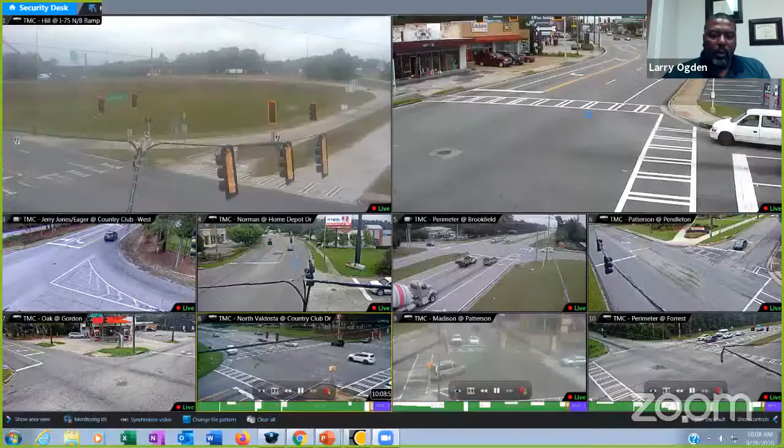Currently, we have 60 cameras at the intersections. We're monitoring traffic to make sure everything flows freely. We try to make it as friendly as possible for the people who live in Valdosta, visit Valdosta, and like to come here and play. We use our cameras for a variety of reasons, but the main one is to make sure traffic is flowing smoothly. If traffic is flowing smoothly here, we won't get that many complaints.

The cameras up here now are some of the intersections where we get a lot of complaints from. The first one at the top left is our northbound exit off of I-75. With that exit, we usually have a problem in the morning time where buses are exiting the interstate.

We're one of the few cities, I guess, that has a situation where we're a city municipality, but we have a county high school located within our city limits. At this intersection, when the buses exit in the morning time, it causes a backup out onto the interstate. So we're using the cameras currently to monitor that and try to make timing changes as needed so that we can alleviate that problem and reduce that hazard, that risk of vehicular accidents with the buses and the high volume traffic on the interstate.

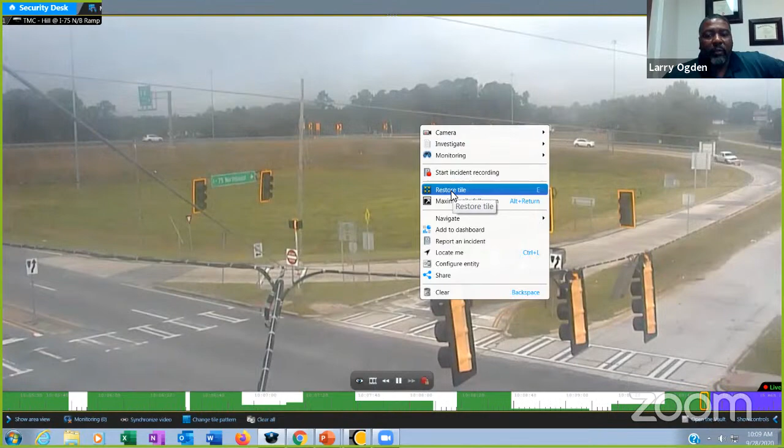We place the cameras throughout the city of Valdosta based on, like I said earlier, complaints that we may receive. If we get a complaint about traffic not flowing or the signal not changing, we use this information. We can go back to the camera and look for those issues when the citizens call them in.

We work closely with the city school system and the county school system, being that the high school is located within the city limits. With the RTC, we can program our school zone clocks for the whole year. Once we program those for the whole year, it takes a big burden off of us because once they're programmed, we don't have to really worry about that system anymore.

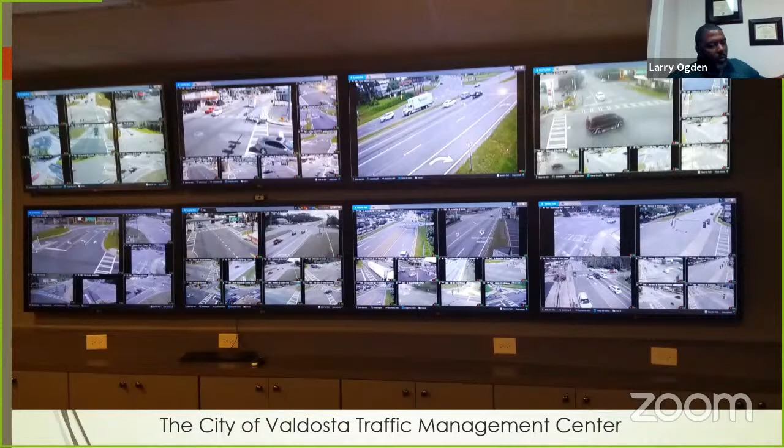The city of Valdosta is one of the gateway cities coming into South Georgia. We have several colleges here: Valdosta State University, Georgia Military College, and Wiregrass Technical College. Being the gateway to Georgia, we try to make it as friendly and inviting as we can, using our technology to promote the city of Valdosta.

Here we have our TMC, where we have many monitors where we can view the majority of the cameras we currently have. The Traffic Management Center is solely for managing and monitoring traffic flow. If technicians notice anything that's not running right, we can quickly dispatch a technician out to that area to see what's going on so we can get it fixed quickly.

As I said earlier, we're using technology like the Glance system, which we recently implemented a few years ago. We use RTC Connect to help with school zones and traffic flow of the buses. We use MaxView, a technology we've been using for several years, where we can get real-time monitoring of the intersection.

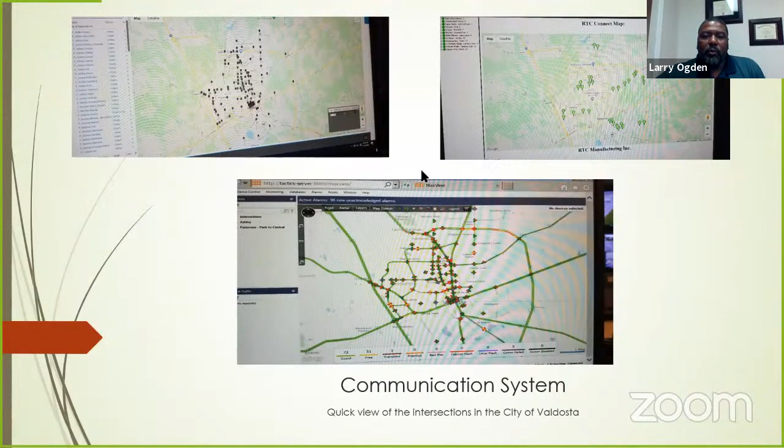If we get a call that a signal is not operating properly, we can go in and do real-time monitoring, making sure the loops are working and the data is correct before we send a technician out to investigate. The RTC is used with the buses, and we also want to make sure it's safe for all the kids going back and forth to school.

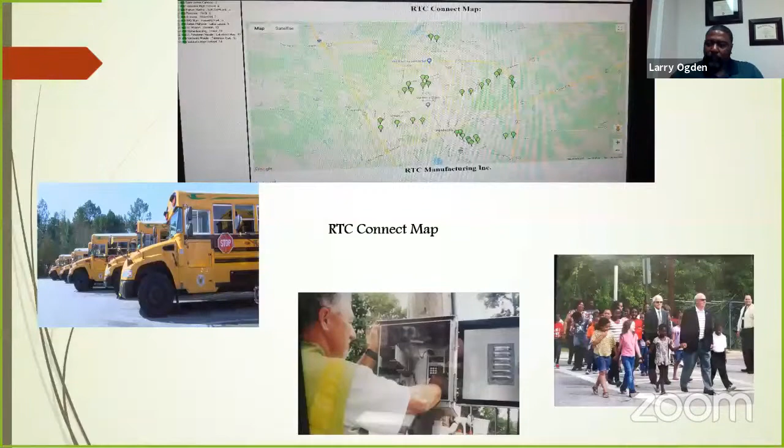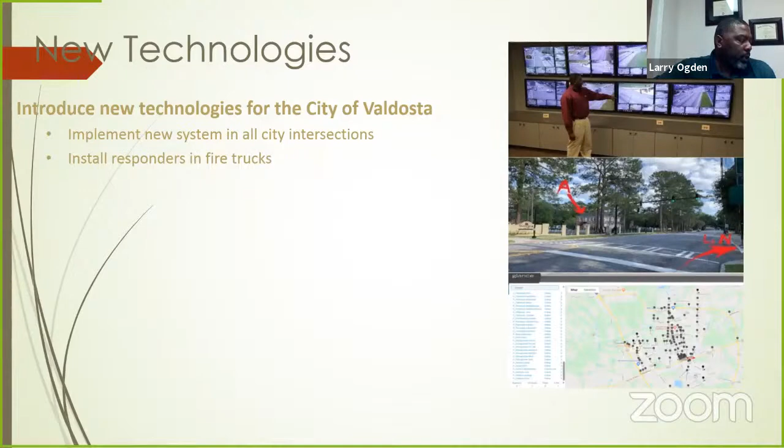New technologies that we're trying to implement: currently, we are in the process of working with Georgia Tech and Valdosta State University, because we have just been awarded the Georgia Smart Communities grant. With that, we're going to bring the technology of the Travel Safely app here to the city of Valdosta.

With the Travel Safely app, we will be able to activate more functions in our signal cabinets and the controller, so that the traveling public and walking public will be able to use this app to know how much time they have before the light goes red, green, or yellow. It will give them real-time monitoring of the signal, so we're trying to make it as safe as we can for the public who are out there traveling.

Walking, in conjunction with Georgia Tech and Valdosta State University, we will have students coming in to work with us to start collecting data. Hopefully in the future, if the opportunity comes up, we'll be able to give an update on the Travel Safely app once we have it all installed in the city and all the cabinets.

Here, what we want to do is make sure we enhance the city's traffic management center with the Travel Safely app. We want to make sure we can put it in all 128 signals throughout the city, the Travel Safely mobile app. This app is going to connect vehicles and connected phones, so in the future we're very excited about Travel Safely.

We want to also analyze the changes in traffic, see if this app will make it safer for the citizens throughout the city, especially the college kids around campus. They always have their mobile devices in hand, so hopefully in the future we can do a new report and give an update on how this app has helped the city as a whole.

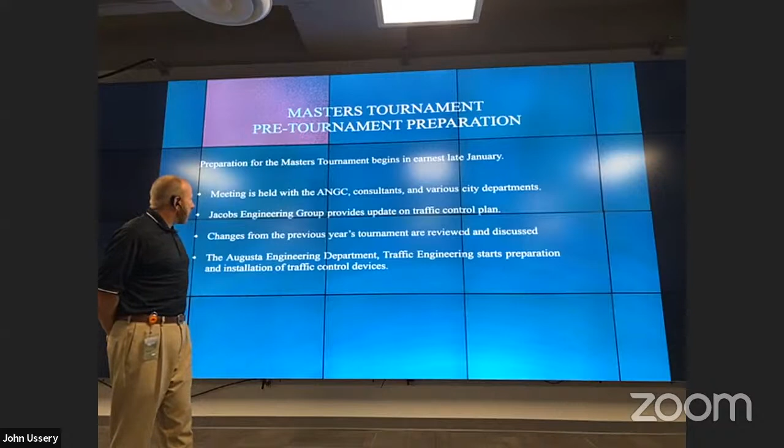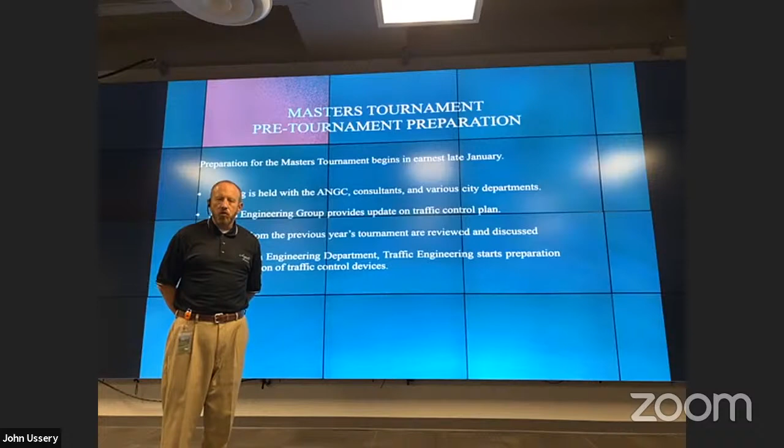A meeting is held with ANGC consultants and various city departments in February. Jacobs Engineering Group provides the update for the traffic control plan yearly, and I think they're one of the sponsors of this event. Every year they provide an update for the traffic control plan that we all use. It starts as sort of the foundation for how we control traffic for the Masters tournament.

Every year, our goal is to make it a little bit better than it was last year. So every year we talk about what happened last year and some of the changes we could make this year to make it better, make it flow better, and try to get people into and out of the golf course in a more efficient manner.

And lastly, the Augusta Engineering Department, Traffic Engineering, we start preparation and installation of the traffic control devices in March, and it begins in earnest after that, but we've been planning for a few months before that.

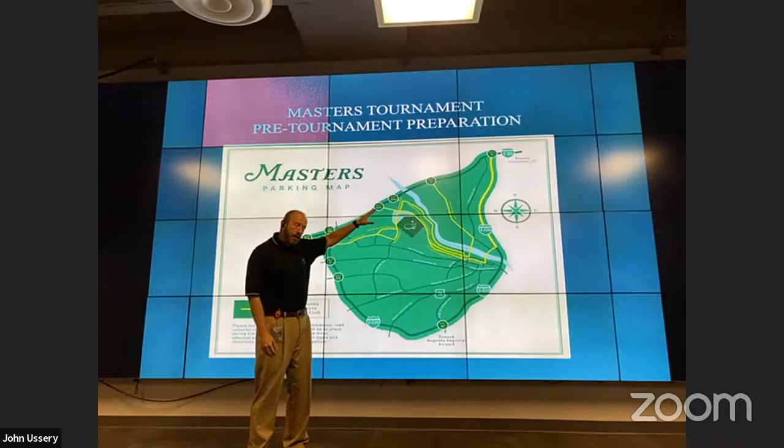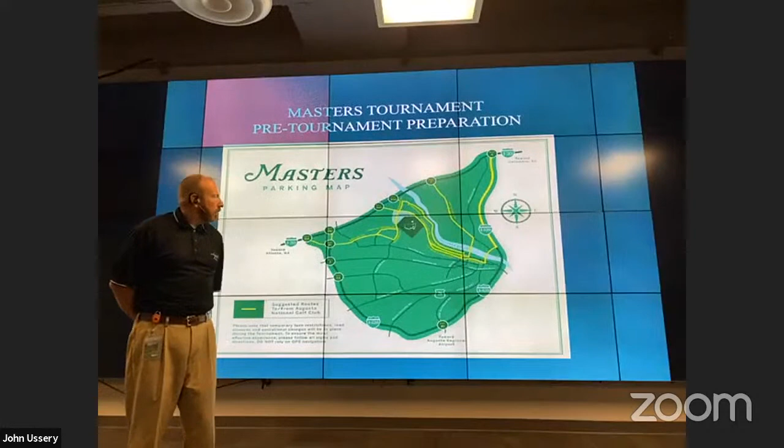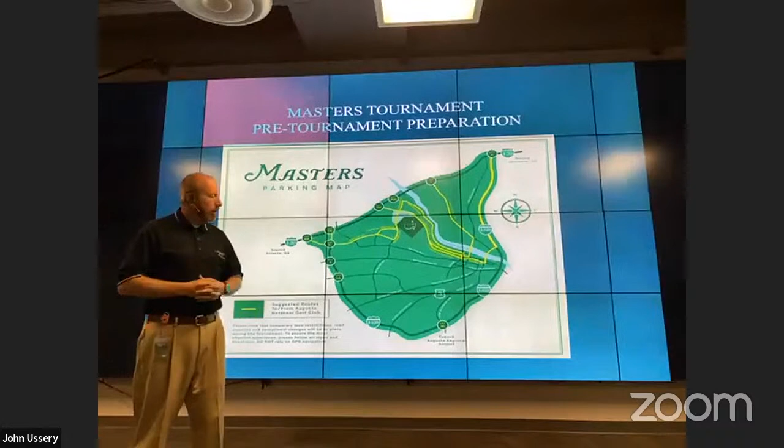So this map here shows you the main routes into and out of Augusta National. If you've ever been to Augusta, you know Interstate 20 is this top line here, on the north side of Augusta. And then we have a bypass loop, which is Interstate 520, or Bobby Jones, as we call it here. You can see Augusta National is here in the middle. The yellow lines are the main routes that we use to go into and out of Augusta National, and those are the ways that we really focus on and prepare to use when it's time for the tournament. Those are the ones we sign and direct the traveling public to.

So I included this slide here to show some of the unique things we do for the tournament. This is the inbound plan, one of the slides for the inbound plan. What's unique about this is there is so much traffic trying to come into Augusta, which is a medium-sized city with medium-sized city capacity. We need to do something with all that traffic that's going to arrive in about a 2 to 3 hour window.

So what we do in the morning is, if you're heading from Atlanta towards Augusta, or heading eastbound, we close the Washington Road off-ramp, because Washington Road down there at the bottom of the slide is the most direct way to get to the Augusta National property. But if you're heading from Atlanta towards Augusta, we actually close that off-ramp and don't allow you to utilize it. We make you go all the way up to Riverwatch Parkway, which is the next major street and off-ramp off Interstate 20 -- it's the yellow line -- and we require everybody to get off there.

What that does is it allows us to better control the inflow of traffic from both directions. If you're coming from Atlanta, you get off at Riverwatch Parkway, and then there are two different options to get to the golf course. The most direct is you go down a road we named Alexander Drive, and that'll take you right to Augusta National property.

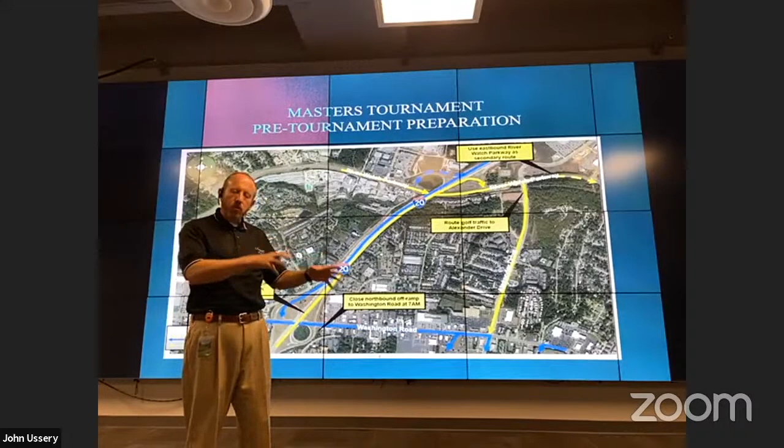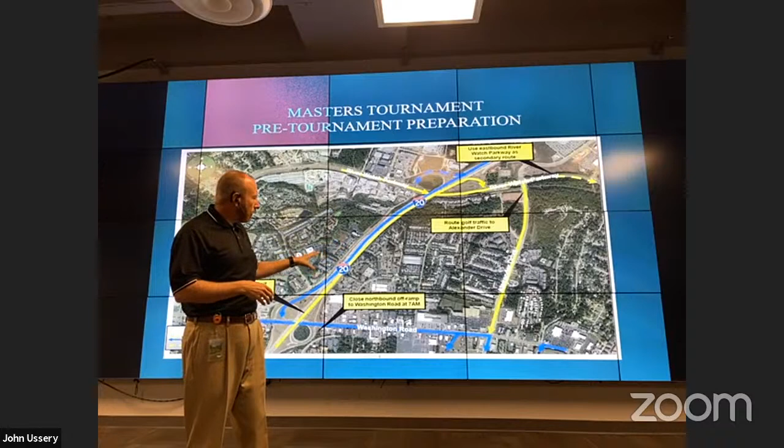And then we'll cycle through who can get to the tournament and which road is going to get the majority of the green time to get to the tournament. We have 3 different directions we can use, and we switch between them to make sure nobody sits in traffic without moving for too long of a time.

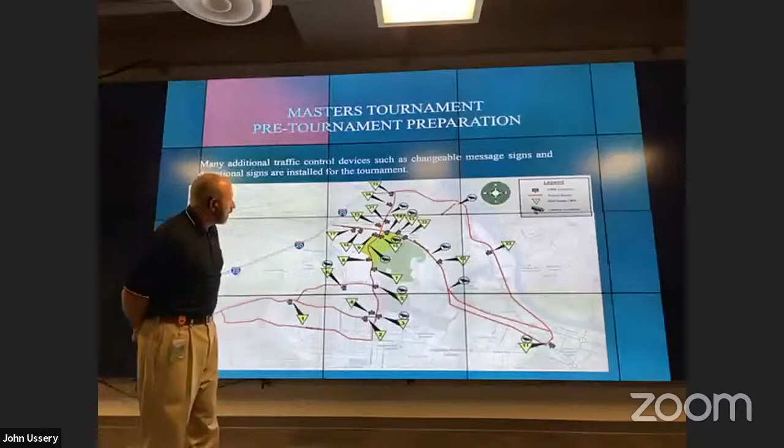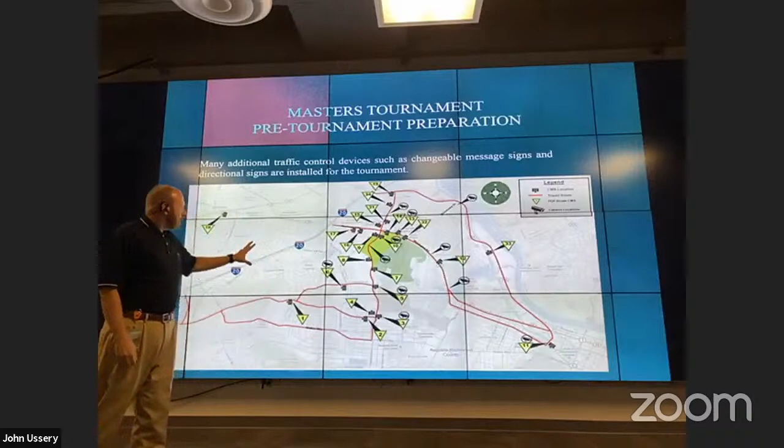Next slide. I included this slide to show all of the various directional boards and portable cameras that we install. You can see all the CMS boards, all the little numbers, placed all throughout Augusta, and even the interstate, which isn't shown here, to help control and direct traffic as it comes to and from Augusta National.

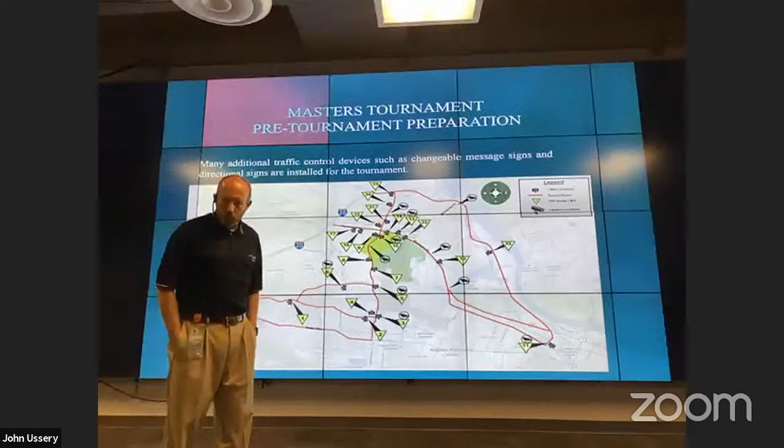The company that provides all of this is actually stationed here with us in our traffic management center, which we'll get to in a bit, a hub of activity for this tournament with a lot of people doing various things. We're working with them in real time. We have several pre-programmed messages in the CMS boards and can change them as needed based on how traffic is behaving and who is or isn't following directions, so we can adjust the traffic and get it where it needs to go.

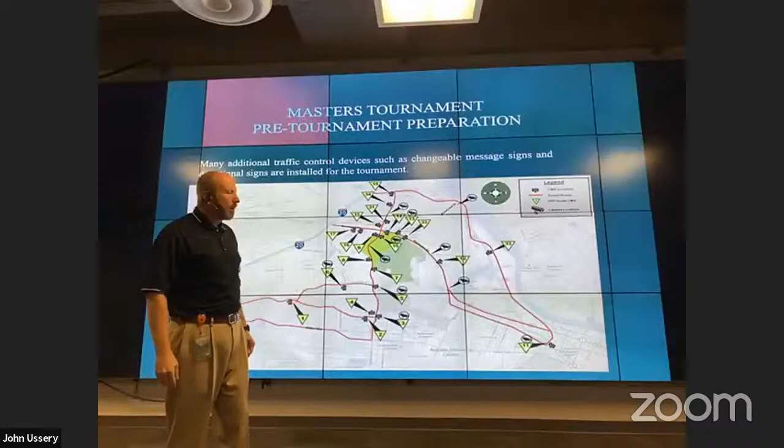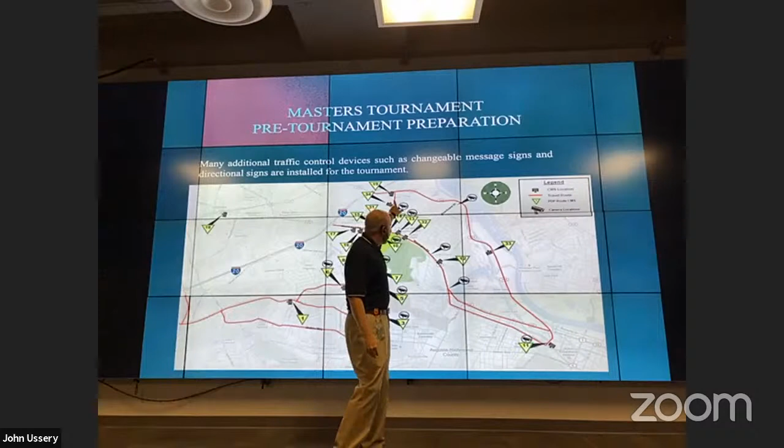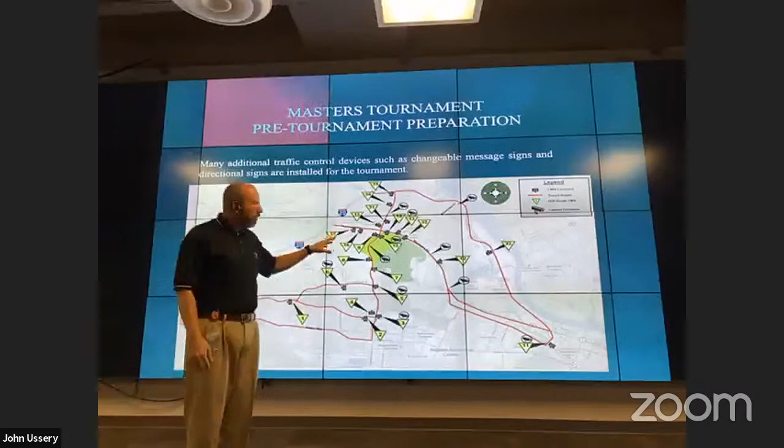I mentioned earlier that if you're coming from Atlanta, we force you to get off at Riverwatch Parkway, and sometimes we send you downtown. You can see that loop here, this red line that goes all the way downtown and then comes back. That allows us to keep traffic moving, even though it's a longer trip to get to Augusta National, so you're always sort of moving instead of just sitting in traffic without being able to go anywhere.

Next slide. The reason I show this picture is traffic engineering. For our months of preparation, we have a lot of signs, not just changeable message signs, but also a lot of static signs that we put up all over the city to help direct golf traffic.

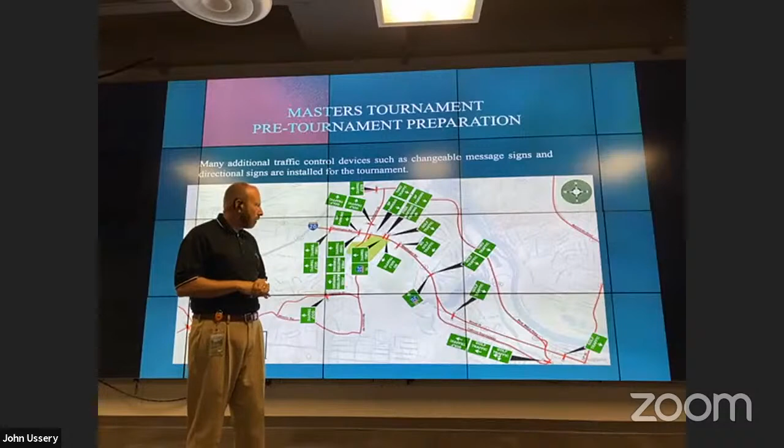We used to put the word Masters on the signs, but we had an issue with that—mostly people would try to take the signs because they had the word Masters on them. So now we have golf traffic signs all throughout the area, and every major route into Augusta National has its own specific directions. Between the static signs and the CMS boards, we're able to direct traffic where they need to go.

Another thing we use is social media. We have a connection with Twitter and all of that, and we send out alerts. The radio stations and TV stations pick up on those, and that also helps traffic flow along the major routes into and out of the golf course.

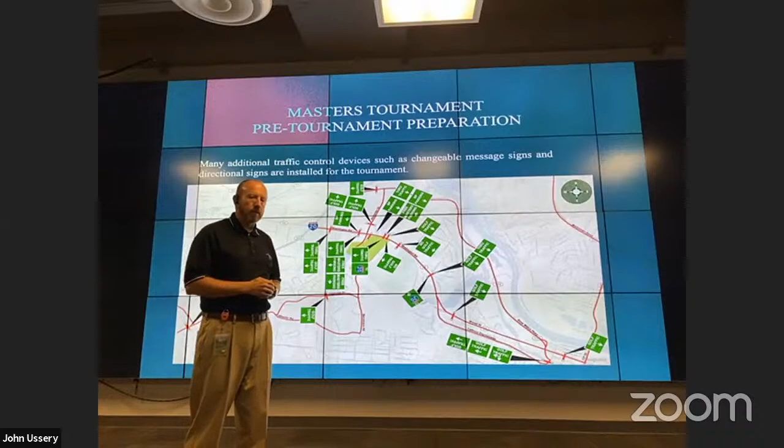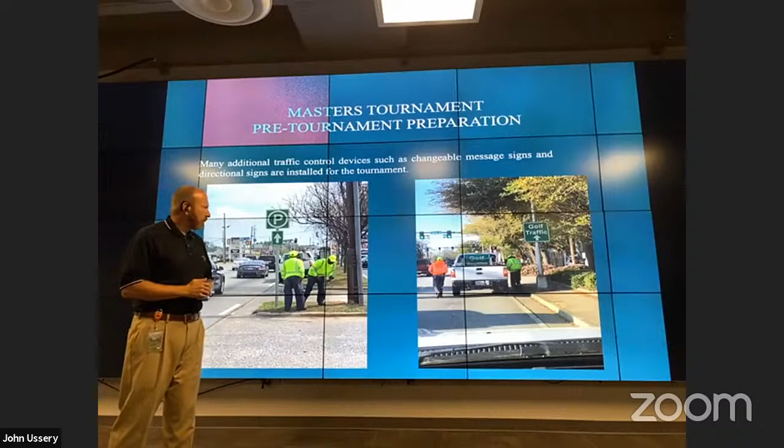This is just a picture of some of our crews working hard installing the various devices we put up. We place them all over, all the way into downtown Augusta, and obviously near the interstates and all the main routes into and out of Augusta National.

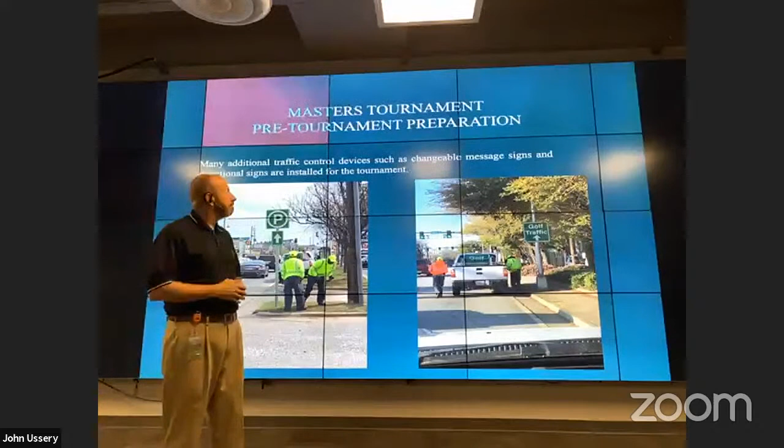So how does ITS play into this? How do we use all this technology and this video wall to help control traffic for the Masters? Our traffic management center, which I'm standing in, is essential for managing the large volume of traffic that comes into Augusta each spring. Through this TMC, we can monitor over 40 PTZ cameras along the routes leading to and from Augusta National.

We have every major route that we showed in the earlier slides covered with pan-tilt-zoom cameras all along those routes. They're easy for us to view, and we use them to manage the queues, the traffic, and the flow. We have very good coverage—there's very little we can't see. Any major route or any way you can get into Augusta National, we can see you as you travel along those routes and adjust what we're doing accordingly.

Each traffic signal along these routes, about 30 of them, can be monitored individually and timed. Each can be adjusted in real time, and we'll show you that in just a little bit. Notifications are pushed to the media outlets and social media as traffic progresses throughout the day.

Typically our morning starts pretty early, and most people are into the parking lot or wherever they're going to park for the golf tournament by mid-morning. Then we have a little bit of time in the middle of the day to reset everything, and in the evening we do it all again.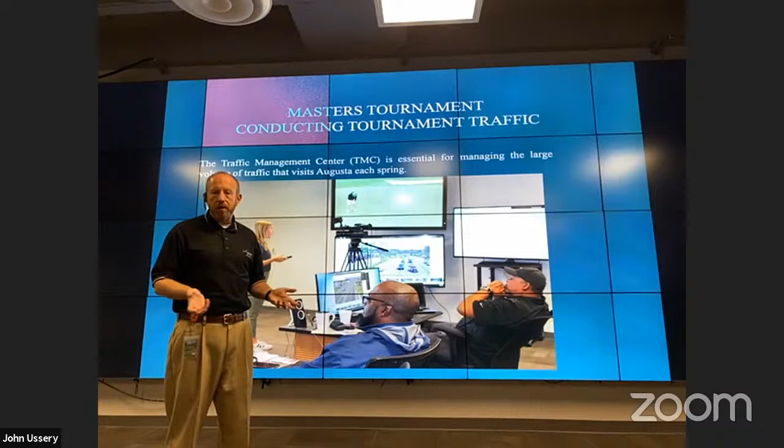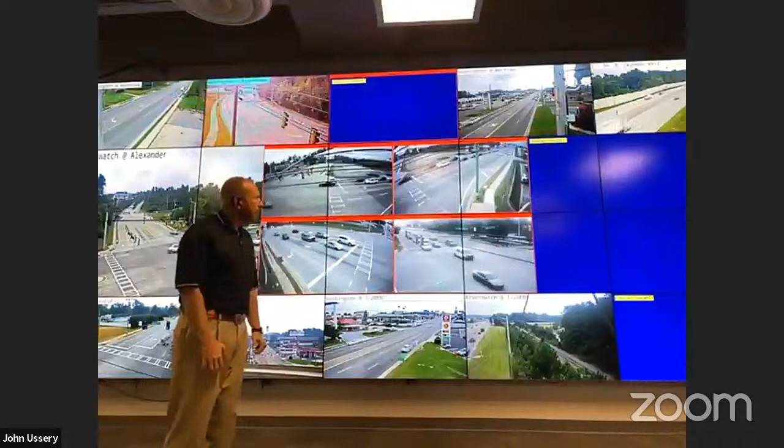So now we're going to take down the slideshow, and we're going to bring up one of our master's presets. We'll give it just a second here for all the cameras to pop in. So this is a preset that we use for traffic that's coming into the Masters tournament.

You can see that a lot of the names should look familiar that I mentioned earlier. There's Washington Road and Alexander Drive and Riverwatch, and through this whole thing, we can monitor all the major routes into and out of Augusta National.

So with having so many people in our traffic management center during this process, we each take a few screens and a few cameras, and we monitor those, and then we communicate with one another about what's going on, where traffic seems to be stalling, which seems to be underutilized, and how we can move that more efficiently.

One thing I wanted to highlight in this particular wall is these red ones here right in the middle. This is actually one camera that has 4 different lenses in it, so we can look at all 4 directions at one time without having to move or pan the camera back and forth.

Last year was our first year that we used this traffic center to do Master's traffic, 2019. One thing we found is, especially at this intersection here, there are 2 or 3 different directions we need to see simultaneously, and we were constantly taking our camera and shifting it from one direction to another, zooming in and out, and turning it. We figured there's got to be a better way to do this, and then we found this camera. So now we can just monitor this one intersection and all of the different vehicles coming into and out of it without having to turn the camera.

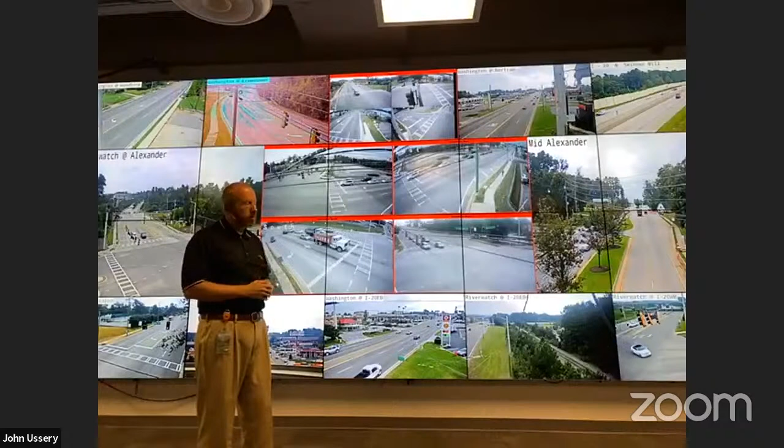So that's another one. We installed 2 of these cameras here, but we haven't been able to test them. Obviously this year there was some issues with Corona, and so they postponed the tournament till November, which is about a month or so. Even then they're not going to have patrons, so we're hoping next year to really see how this works for us, and we think it's really going to help.

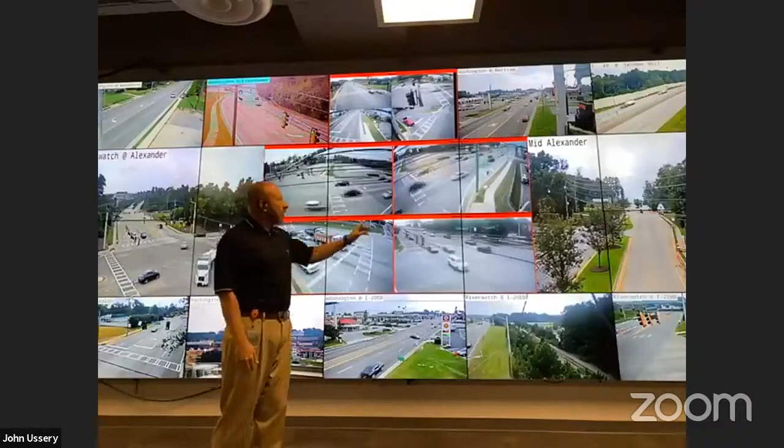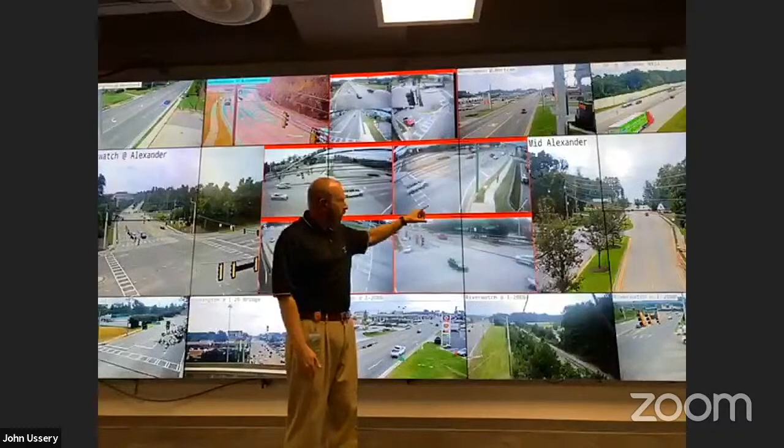The other one I want to point out over here is Mid-Alexander. When Atlanta traffic gets off the freeway, they get off at Riverwatch Parkway, and then they turn up Alexander Drive. Before, we only had a camera at the bottom and at the top where there's 2 signals. Now we have a camera in the middle, so we can see how far the queue progresses back. Then when it reaches a certain point, we have a sheriff's officer down at the bottom who'll close the road, and then we'll detour everybody downtown.

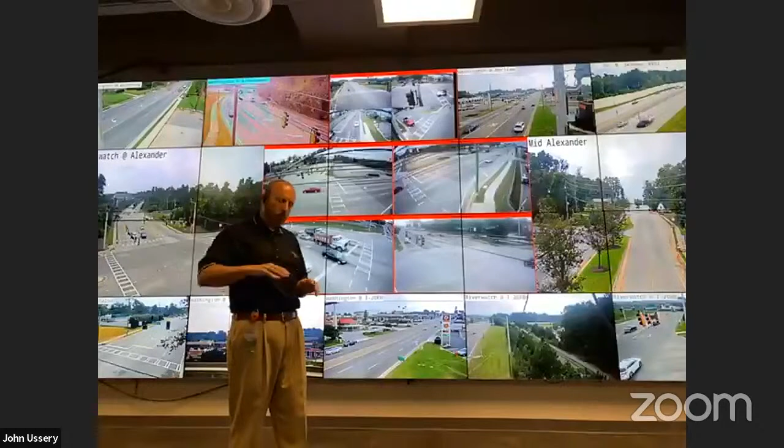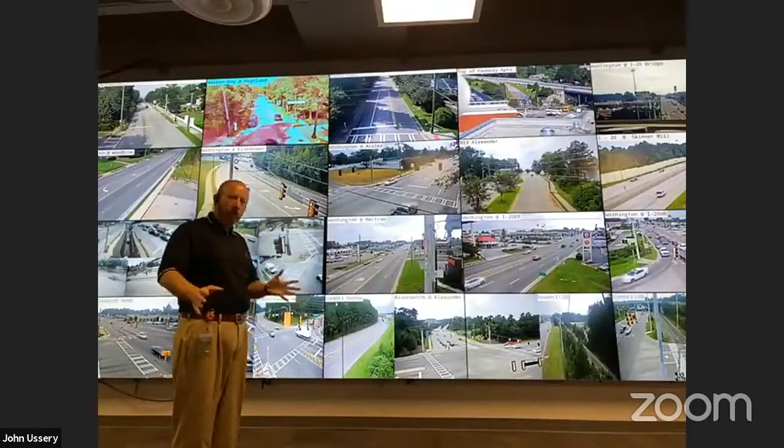Next, we're going to bring up an outbound plan. This is in the afternoon after everybody's enjoyed the day at the tournament. We have to get them out of the parking lot and back to their hotel or their restaurant or whatever it is they want to do. So you can see this one's slightly different because our outbound plan has an outbound route that is a little different than what we normally do for the inbound.

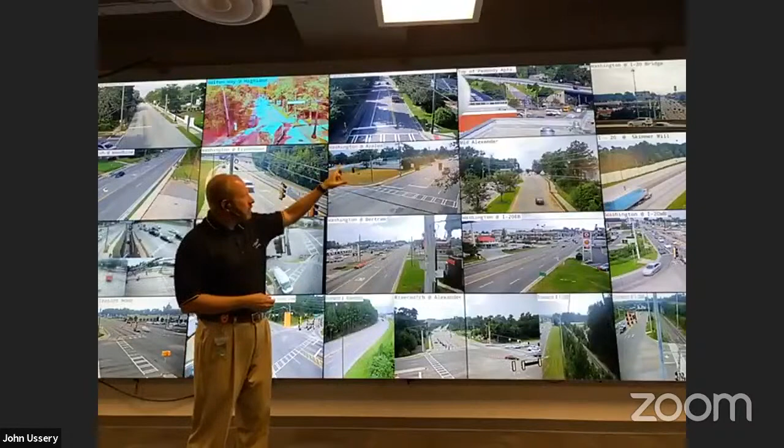You can see there's several more cameras that show downtown, and some that show Walton Way and Highland. There's some other areas we have to monitor that are different for the outbound plan than the inbound plan, but it's the same idea. We monitor the traffic, and when everybody wants to leave Augusta National, we'll typically close shortly after the final pairing of golfers finishes their round. They'll stay open for a little while so people can buy their merchandise and whatnot, and then it's time for them all to go.

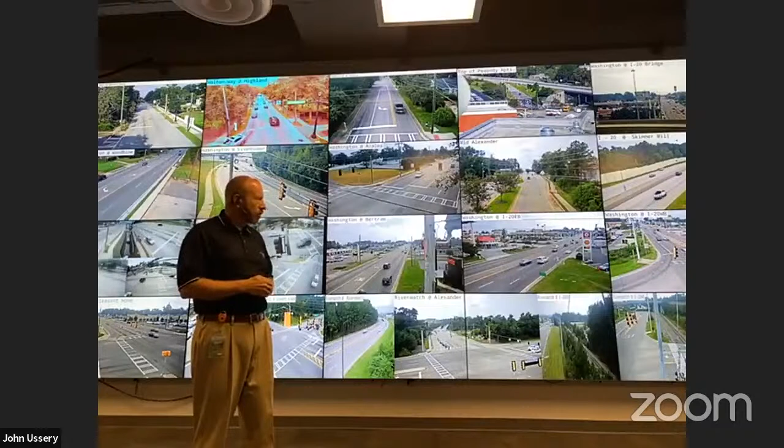So we have a large group of people all on basically 2 streets, and we need to get them out and back to their hotel or back to where they want to eat or whatever event they're going to go to after the tournament is over for that day. This really assists us with that.

A lot of how we do that is we have adaptive systems on most of our traffic signals around Augusta National. Most of the roads that lead to and from it have an adaptive traffic system on them, and we're able to get in and sort of force different phases on and off and control how traffic flows. We also close down a lot of our left turns at that time, so it's sort of a running joke here in Augusta that you can't turn left during Masters Week, and it's mostly true.

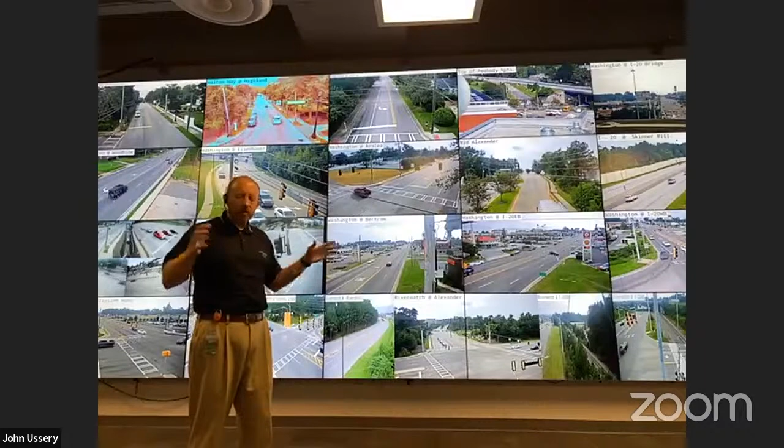What we do is that because left turns take a lot of time to execute, we need to make sure that traffic can get out as quickly as possible, because everything sort of dumps into one road, and then once it gets there, it disperses among the city. So this is what we do. Go ahead and switch it to the next one.

What I'm going to show you here is our InSync system, and this is our adaptive system that we use. We're going to bring that up here in just a second. You can see over on this side the fixed cameras that we use to detect the vehicles, and you can see vehicles entering the detection zones. You can see what's red and what's green, how long it's been green, when it last changed, all that information you would need to know if you were monitoring this.

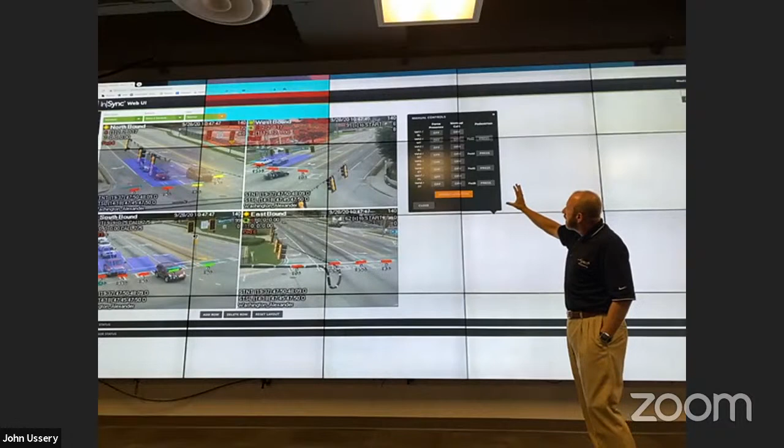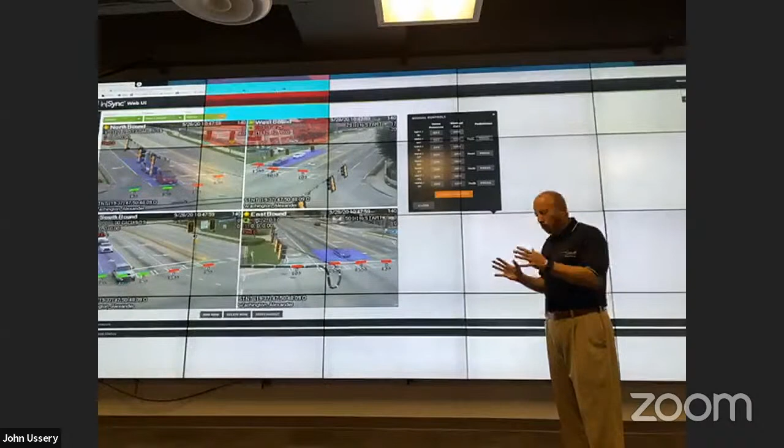The other thing we wanted to control is we have manual controls to this system. This is how we force certain phases on and off. We'll have 2 or 3 technicians in this room, and they'll each take a group of signals that are in sequence. One technician will force one of the phases green, and then in sequence, the other 2 technicians will take their groups of signals and do the same thing. We're able to move out a lot of traffic in a very short amount of time using this. The adaptive signals work pretty good, except for when everything comes to a standstill.

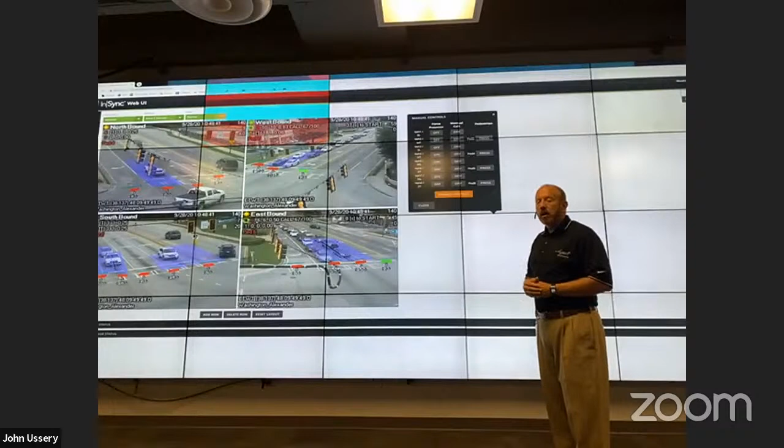So if traffic is severely impacted, the level of service drops way down. The software doesn't quite know how to handle it, so it still needs a human touch, so to speak. That's how we best control the traffic exiting the golf course, as we can override it wanting to go through all 6 or 8 of its phases, and force certain phases on and off for long periods of time to get a large group of that traffic flowing outbound away from the golf course.

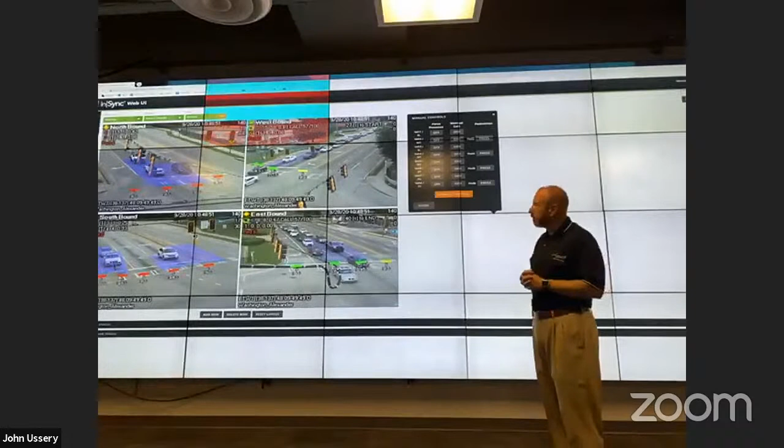So we're going to go back to our slideshow here real quick.

Just as a final note, about 2 months after the tournament is over, we all meet together to see what worked, what didn't work, where there were problem areas, and what areas we could improve upon. That gives us a head start for the next year, and we can think about how we could improve certain situations. Every year we try to improve the traffic, reduce the travel time, and make it less obstructive for you to get from wherever you're staying into the parking, so you can go to the tournament and enjoy yourself. That's always our goal, to speed that process up. We've done that over the last few years, and we'll continue to do that as we move along.

As I mentioned earlier in the presentation, it takes us a while to get everything back. We put up a lot of signs, and we repaved a few intersections, so from a traffic engineering point of view, we have to put everything back. It takes a week or two for us to get all that stuff taken down. There are a lot of residential neighborhoods around Augusta National where people will park if we don't put up signs, so we put up a lot of no parking signs, in addition to the directional signs you saw earlier. So we get it all back to normal, and then we wait about 8 months and do it all again.

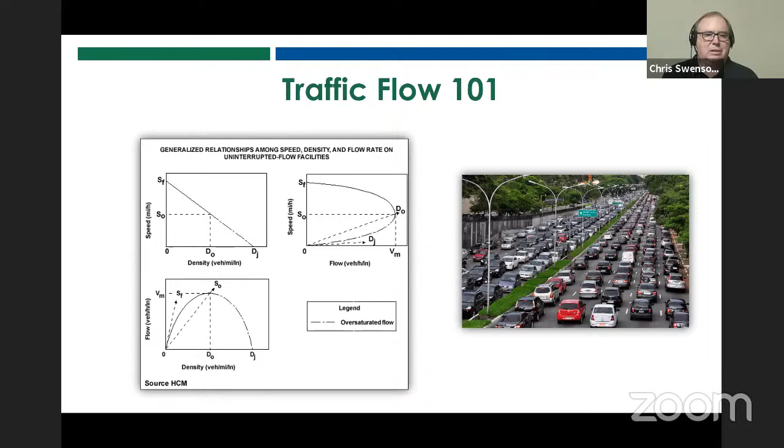And we found that it's not just theory. This is a scatter plot, and it's only a scatter plot. No, we didn't try and make it look like the classic backbending curve. It just came out this way. And this is in 2016, obviously way pre-COVID. It's on I-75 South at 10th Street.

One of the reasons we like to look at measured maximum flow rate versus the theoretical flow rate is there's just too much that can be impacting the flow rate. And for those of y'all who are really familiar with it, you know there's a lot of weaving going on at this particular section as 75 and 85 come together. But we also know it's capable of carrying a good bit of traffic. Now, when we convert this to vehicles per lane per hour, the maximum is about 1,600 to 1,800 vehicles per lane per hour before flow starts to break down.

Next slide, please. And we're just circling the flow breakdown in the bottom left, and you see flow drops dramatically as speed drops. They're definitely connected, but it's density, traffic density, and the number of vehicles per mile that's really causing this problem.

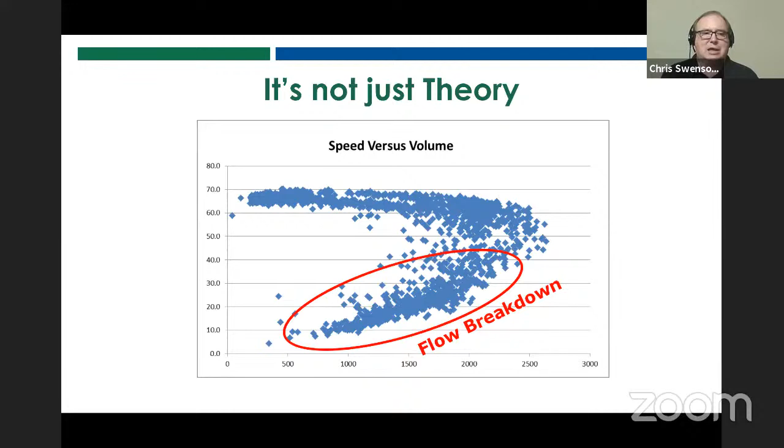Next slide, please. What we're trying to do is operate as close to the maximum as possible, and that's shown with the red box there. And what it depends on is how good the algorithm is, but even more importantly, how good is the detection on the roadway. If we've got a plus or minus 10% issue with our detection, we're going to have to back down to the left on that box to make sure we don't drop into a congested flow situation. If we've got highly accurate detection, we can start moving to the right and really maximize what we can get through without worrying that we're going to have to eventually deal with a flow breakdown if we're not careful. Next slide, please.

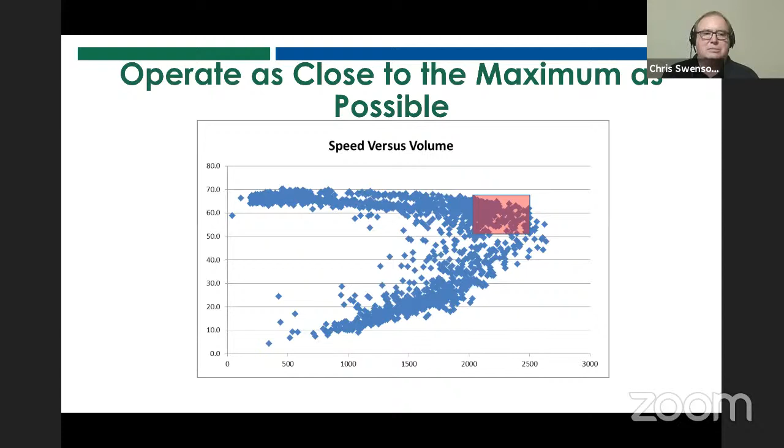Now, I want to really emphasize here that CARM is focused on maintaining stable flow and maximizing vehicle throughput. And that's not just holding people back on the ramp. It is, when the opportunity presents itself, moving people as rapidly as possible off the ramp and onto the freeway. You can see the dark blue line in this image, that's the median, or that's the average — I'll just say average, I won't get too fancy here. That's the average traffic flow for the hour. And nothing surprising here, morning peak, afternoon peak.

This was taken in Colorado when we were doing some checking on a very accurate device called a turtle. And you can see that over a very short period of time, the flow varies from an hourly equivalent of 1,300 vehicles per lane per hour to an hourly equivalent of over 2,200 vehicles per lane per hour. Now, if we were to shove traffic onto the freeway at the time we're seeing these peak flows, we're going to get a problem and we're going to have a breakdown. But during those times when we have very low flow, well, very low flow for a peak hour, we want to move traffic on there as quickly as we possibly can to take advantage of those lulls, brief as they may be, in traffic conditions.

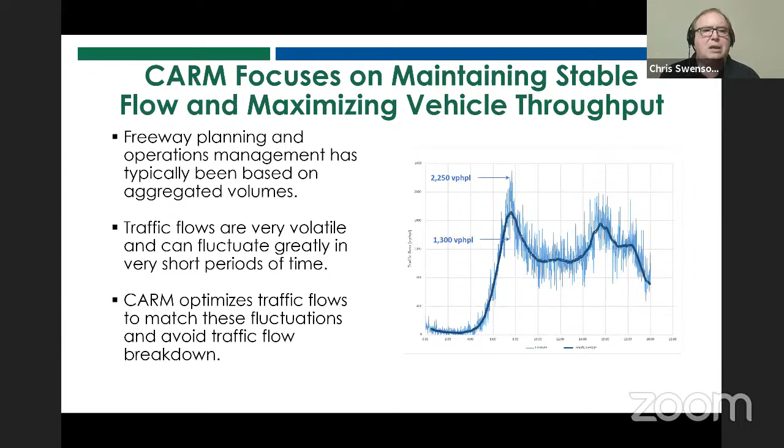All this is — I'm not going to spend a lot of time here — you can see we've got a flow occupancy curve, and unmanaged is at the top. The bottom one actually shows a managed facility, and you can see all the flows stay on the positive, no-breakdown side of the curve, with one exception that snuck out there. Next slide, please.

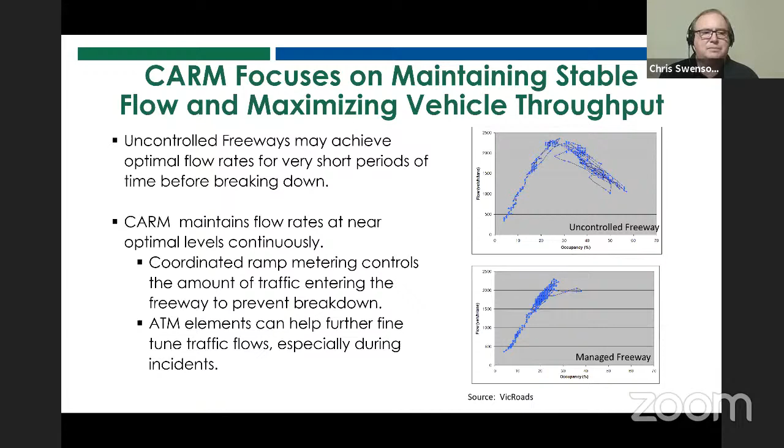This is what I call my two kangaroos and a wombat slide. It's looking at Australian managed motorways and how they've actually performed. I call it two kangaroos and a wombat because when I first heard this was done in Melbourne, Australia, I wasn't thinking it would have much knowledge for the US. I thought Melbourne was a relatively small city, but it turns out the latest population estimate is just under 5 million. So not quite the size of Atlanta, but by any reasonable definition, it is a major metropolitan area.

You can see two heat maps near the bottom. On the left, we have pre-managed motorways, that's their CARM system, and you can see a lot of red showing up there indicating bottlenecks. They go ahead and get it implemented, get it running right, and you can see it really settled down, with very little congestion still occurring. So it works, folks, and it should work here in Atlanta.

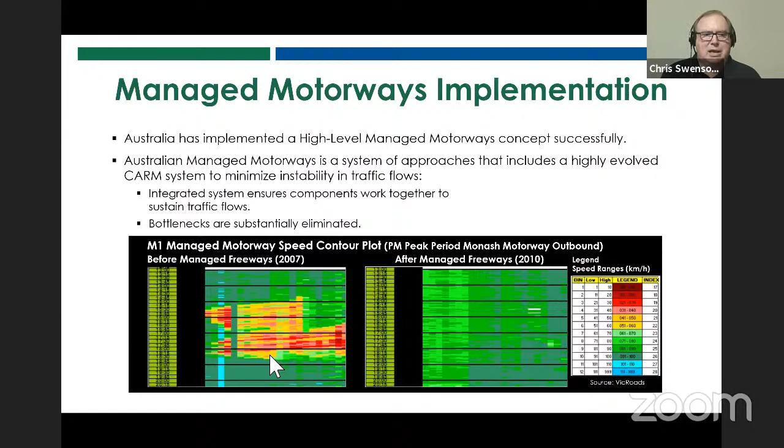Continuing on what Chris was talking about with Australia, we're going to shift gears over to Atlanta's challenges. First and foremost, the existing roadway structure within Atlanta is old and was never designed to handle or accommodate current traffic volumes. This differs from Australia, where they were able to build their roads in a certain way to at least accommodate managed motorways. We don't have that capability here, so we're going to have to make do with what we have.

Another thing is technology and software improvement will need to be made for this to be feasible. As Chris stated with the detection, that's going to have to be brought up, as well as getting software and algorithms associated. There's also skepticism to the idea of managed motorways being feasible, and coordination between offices and agencies will be vital for success. Implementation costs for CARM are also expected to be significant, and a pilot will be needed to prove the concept will work on a large scale before we can get massive buy-in.

So this brings me to the big picture. CARM is integrated data collection sensors and advanced system management tools. They monitor and control real-time traffic conditions. CARM requires highly specialized software that can manage the system in real time and integrate data and information expediently. Georgia's not here yet, but we feel we're very close. It also synchronizes the flow of vehicles entering a freeway with those already on the freeway, and real-time demand management maximizes overall efficiency.

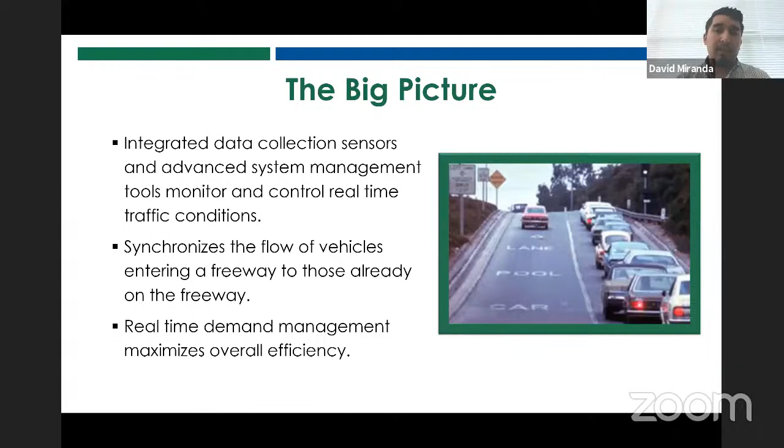Let me talk about a few of the pros of CARM. It enhances active management tools and dynamic demand management tools of managed lanes, and will be a key element in a comprehensive package of strategies to fully manage freeway mobility, as Chris mentioned earlier. Continuing with pros, they manage all lanes on the facility for proper operation. Currently, we don't have that capability.

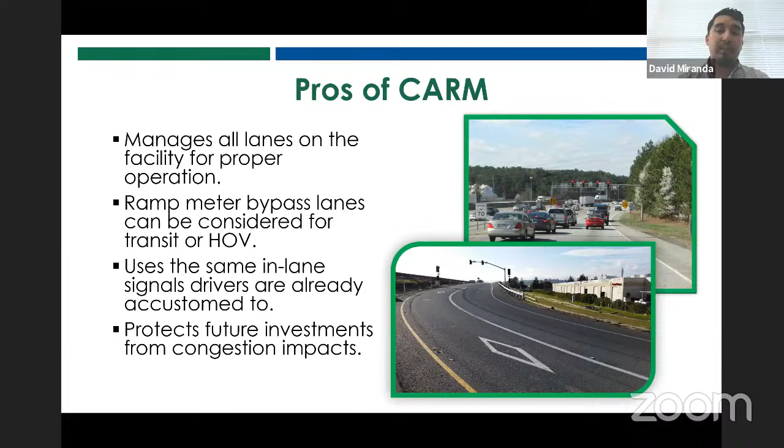Ramp meters can also be implemented to bypass lanes for HOV or transit, as you can see in this picture to my lower right, which is in California. It's not currently implemented in Georgia. They use the same in-lane signals drivers are already accustomed to, and will protect future investments from congestion impacts.

Let me touch quickly on a few of the negatives of CARM at the moment. It's counterintuitive and may be difficult for the public to understand, so outreach will be vital to overcome this. It requires dense and highly accurate traffic detection and additional software, and will likely require development of additional ramp storage. Both of these are in the works and should be arriving soon.

Freeway to freeway interchange metering will be needed for best results. This has been looked at in the past and is currently not a direction the department is going in right now. It's not to say it won't happen in the future, but it's not on the roadmap currently.

CARM efforts in Atlanta: in 2016, the first managed motorways corridor feasibility study was started. In 2017, that led to a benefit cost study and feasibility analysis. Those were completed and led to the next managed motorways task order in 2018. This was further effort to test feasibility and future requirements needed for a functioning ramp metering system specifically, and also led to the creation of adaptive ramp metering guidelines that the department can use.

The CD collector distributor ramp meter design study has just gotten started, kicked off this month, and is expected to go for the next year. In the future, we are currently putting all our efforts towards getting a full-blown CARM corridor pilot, though where it's going to be, we do not currently have identified.

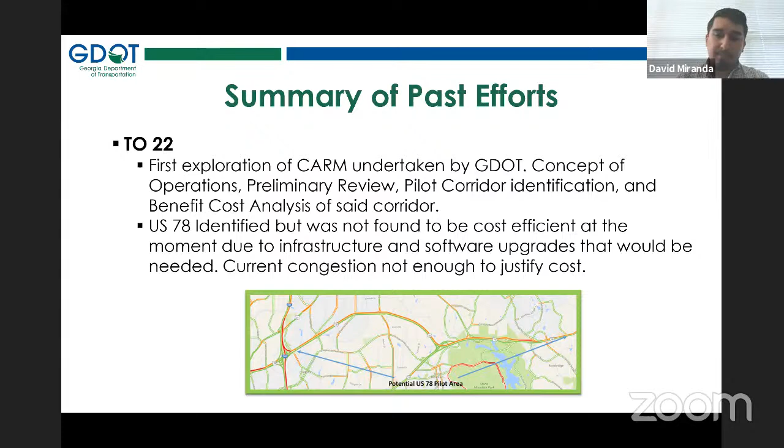So we moved on with more efforts. Task order 30 was a small effort to test the TIRTL device, an infrared traffic logger, against an automatic traffic recorder count station. We tested this on I-475 against an IVID as well. The TIRTL and the count station were very close, about 0.2% accuracy to each other, and the TIRTL outperformed the IVID. The drawbacks were that the TIRTL was not cost efficient and needed specific roadway geometry. We also weren't able to test congested conditions on 475, since it doesn't get as much traffic as Atlanta actually sees. We used TIRTL specifically because of its extensive use on the M1 corridor in Australia, so we figured if it worked for them, it might work for us.

Detection also needs to be improved for an effective CARM system, as Chris mentioned earlier. Queue management and policy decisions are big hurdles to overcome soon, but we are not there just yet. ATMS integration, detection, network accuracy, and maintenance are more factors to consider, and with the new ATMS coming out soon for GDOT from Kapsch, we are looking forward to the possibilities with that.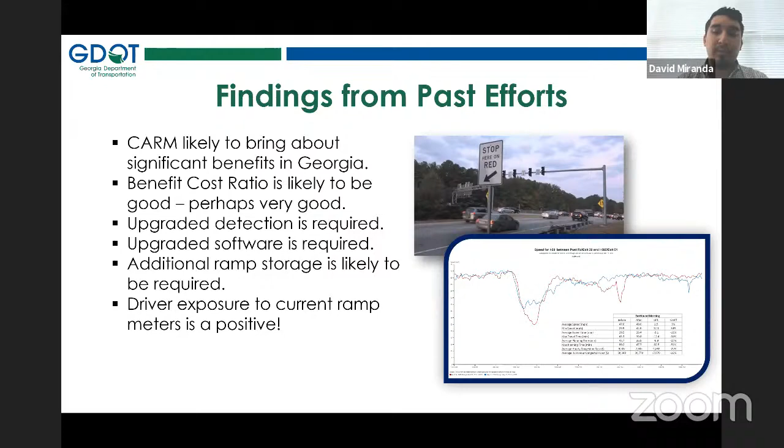As you can see in this lower right corner, this is a speed versus time diagram for I-20 westbound before and after the ramp meters were put in. The red line signifies before and the blue line signifies after. As you can see, the ramp meters did help flatten the curves quite a bit, where the speed broke down. We are hoping that ramp metering can improve the condition almost to a flat state. The motorists within Georgia do see that the ramp meters are helping out in traffic and are warming up to them.

This leads to our current efforts. CD collector ramp metering design guidelines have kicked off, as I mentioned earlier, exploring ramp metering on CD collectors and constructing guidance for its future implementation. Below here in the lower right are some of the VISSIM models we are currently going to get out of this task order, just to see how this is happening.

The collectors and distributors are important because in order for a managed motorway system to work specifically, we're going to need everything metered. All entrances onto the main line have to be closed off, and there can't be a spot where people can sneak in without ways being constricted to a degree.

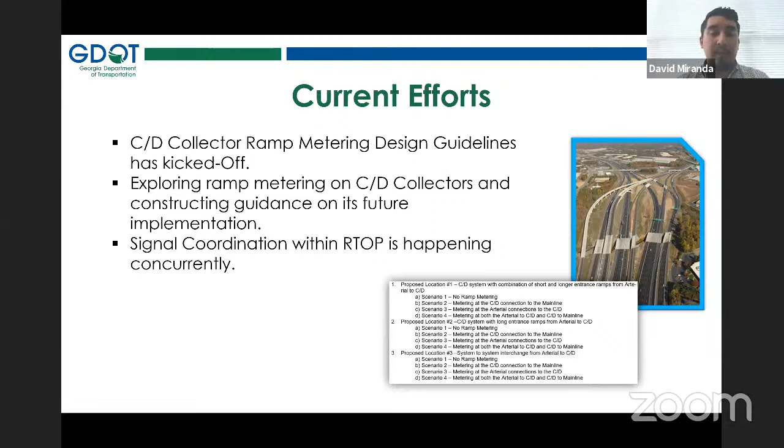Signal coordination is also happening within RTOP concurrently. That is not currently happening with ITS involvement, but any coordination happening between signals and ramp meters is a good thing, and hopefully that will make things easier for us in the future with managed motorways.

So to continue on with current efforts, Max Time, Max Ramp 2.0 will be our current effort to streamline ramp meters in Atlanta. Upgrades and updates to that software will continue to support ramp meters where applicable and should make managed motorways and algorithm support a lot simpler.

Ramp meter metrics build out is also underway to assist with maintenance issues and data visualization of ramp meter efficiency. This is important because we need to make sure our ramp meters are working, and we need a good data-driven solution to prove that we're actually getting results. The metrics will help in doing that.

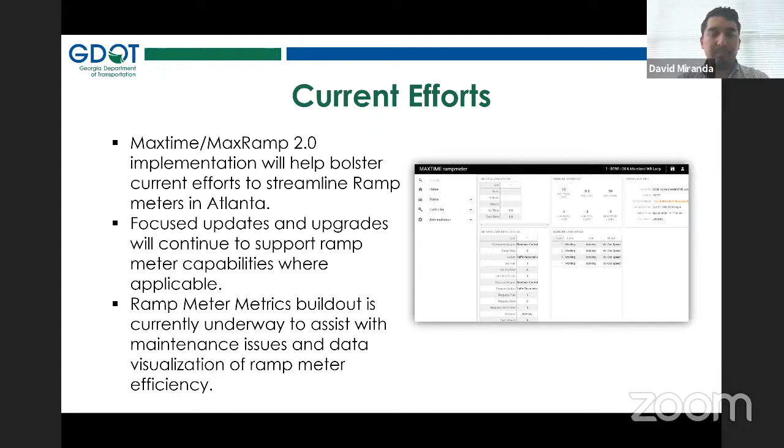So for future expansion, GDOT is working towards a full-blown CARM pilot corridor. Past and current efforts have been working towards collecting guidance and building the infrastructure necessary to implement this in a meaningful way. We've also been coordinating with DOTs around the country to share ideas and collaborate on best practices for CARM.

There are places that have implemented CARM pilot corridors, notably Washington and also Colorado. We look forward to finding out what pitfalls they encountered and what worked for them, so we can implement the best strategy going forward for Georgia. Now at this time, I'd like to open up the floor for questions.

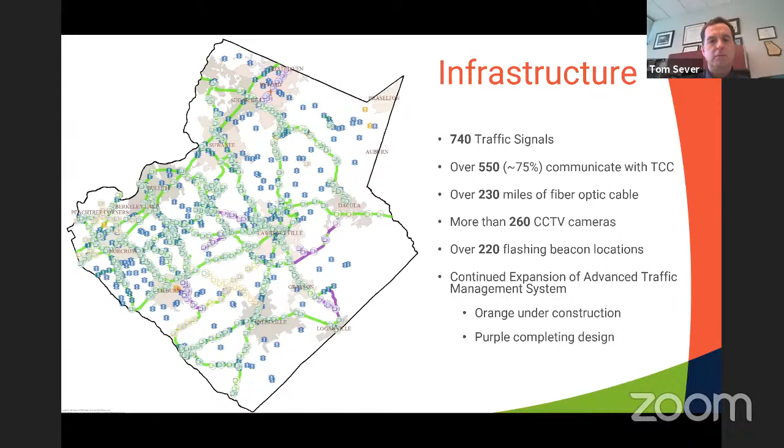So I'll talk about our master plan real quick. Again, it was funded through a Georgia Smart Communities grant. We had matching funds from the county SPLOST. We were fortunate to be one of the initial cohort of the Georgia Smart Communities Challenge.

Part of the benefit of this project was the safety research led by Dr. Angshuman Guin at Georgia Tech. It also gave us additional guidance to move forward with our Smart Corridor pilot project, which I'll talk about later. And it also helped us identify the developmental needs for the expansion of connected vehicle technology and applications over the next 5 years, kind of how we envision some things operating that aren't there today. So this will give us a path forward.

I'll talk more now about the tech research that we conducted, again led by Dr. Guin. We did a lot of stuff looking at the data and the off-route filters. We did some data collection on 17 trucks, engines, and med units from 6 different fire stations. We had Georgia Tech equipment deployed for that data collection on our county vehicles.

You see we get a number of off-route filter locations, such as the fire station. You can see Fire Station 4 highlighted in its service area. In the lower picture, you can see all the dots around the station itself, representing the engine or the med unit being in the station house. That's filtered down by the response location at being less than 7 miles per hour for more than 4 minutes. So you would have a similar plot at a response area when they've arrived after a call started.

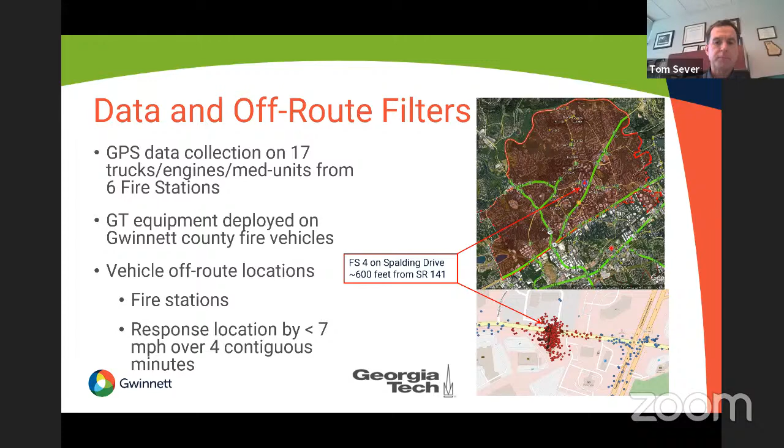So what are some of the results? This one is a percentage for red light on the approach. Here we're focusing on a different fire station, number 19 off North Berkeley Lake Road. It's about 1,100 feet from the fire station driveway to Peachtree Industrial Boulevard. With Peachtree Industrial being a major route, you can see we have a pretty frequent occurrence of the fire vehicle arriving on a red, 86% of the time in our initial data collection. So those are the kind of things we're looking to make improvements on.

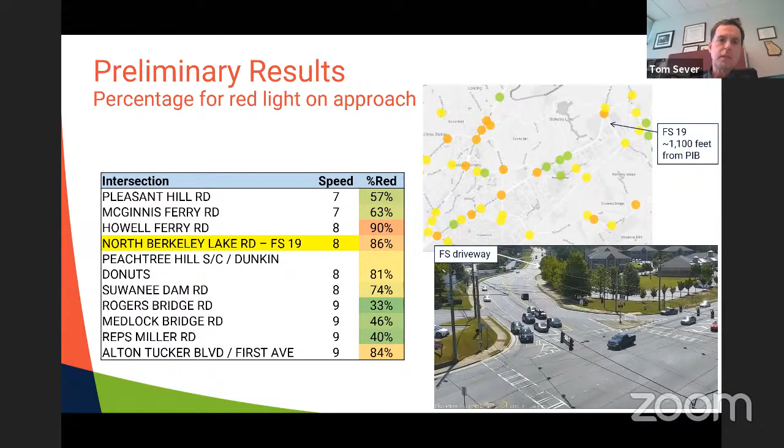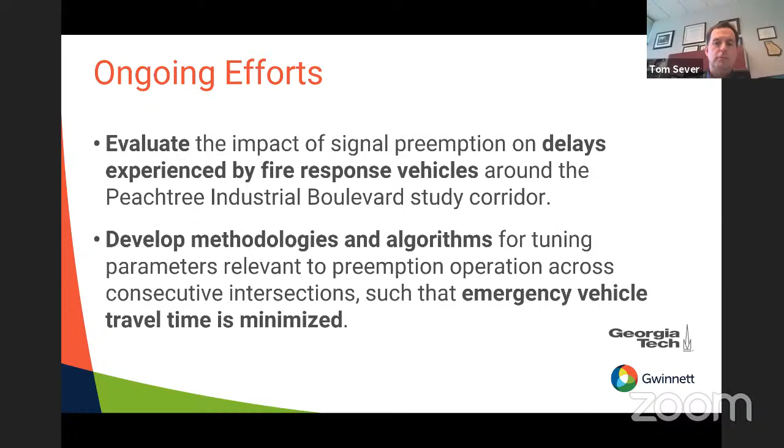So we decided that after the Georgia Smart Challenge wrapped up, that we wanted to continue our efforts with the research. We want to evaluate the delays that could occur with signal preemption, both for the emergency vehicles and how we could reduce those delays, but also what we would impact with our traveling public. So we're developing the methodologies and algorithms for tuning these parameters so that we can minimize that emergency vehicle travel time.

The methodology has several steps. Currently, they're creating a software in the loop simulation, which is a combination of VisSim and the MaxTime software. They're going through calibrating those volumes. We'll do some additional data collection to get a new consideration of the fire truck delays, and then continue to test those out in the software simulation.

So here's the rough architecture of connecting VisSim and MaxTime. First, you take some historical volume data. You take the GPS data from our emergency vehicles, and then you plug it into the software in the loop, which is looking at VisSim interfacing, and then taking that even further down into a MaxTime instance. It's a virtual instance, not a real traffic signal, but it's a way to evaluate different scenarios of arrival of the emergency vehicle on a green or on a red and seeing what the impacts would be.

So there's still some work to be done on that. We're imputing the turn counts either from our local data, TMC data, or from ARFC's data, automating that process of connecting these multiple instances of MaxTime to the VisSim, and then getting real detector output into VisSim from MaxTime real locations, so you can see as the signal's actually running if you implemented an emergency vehicle preemption on top of that.

We can even take this software in the loop to a more granular level. We can evaluate on a regular basis, as well as even, is it better to lead or lag a left turn phase at an intersection? So we're really excited about the potential impacts of this software in the loop simulation.

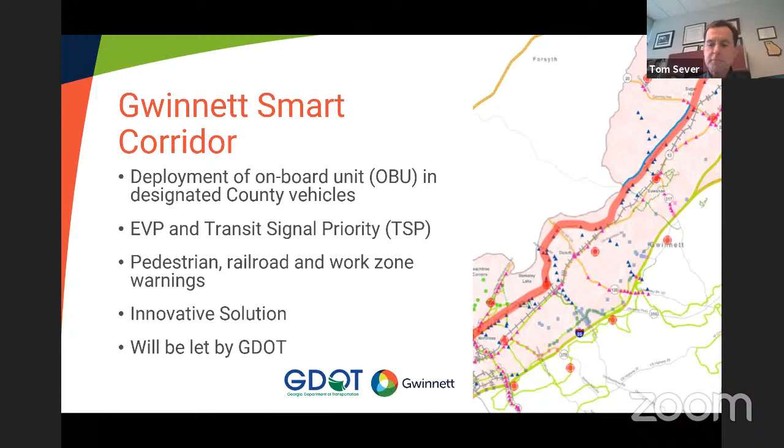Another big part of this project is going to be an innovative solution. It's great to deploy this technology and gain information to use in our traffic control center or share with Georgia DOT or other partners, but we ultimately need to share this information with the public. So if somebody's got an innovative solution that can help us make that happen faster, we will be very excited to learn about it. This project is also going to be let by Georgia DOT, as were the previous projects discussed.